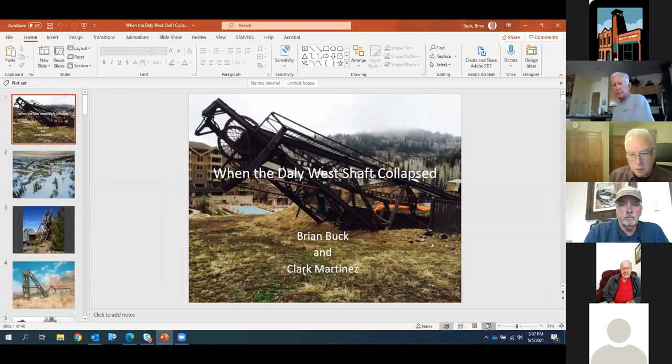So I'm going to go ahead and share my screen now. Does that look okay, everybody? So again, this is what the shaft headframe looked like after the collapse.

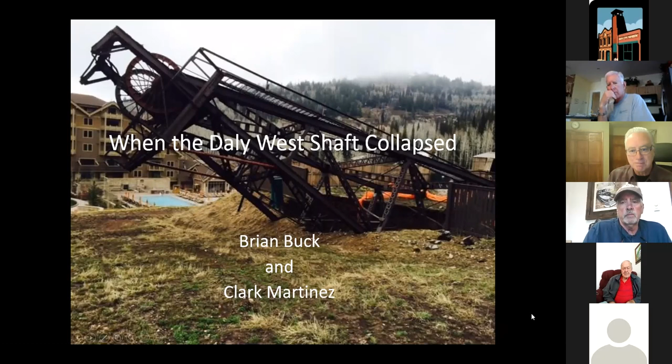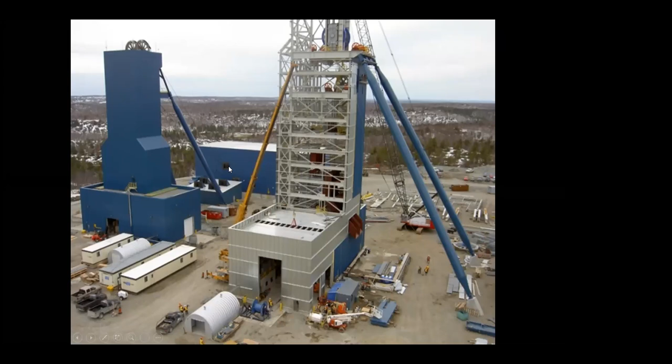The head frame under construction on the right is 15 stories high and not yet fully enclosed. Note the workers on the ground for scale. In cold climates, head frames are typically enclosed in buildings, which was the practice on most of the historic head frames in the Park City mining district.

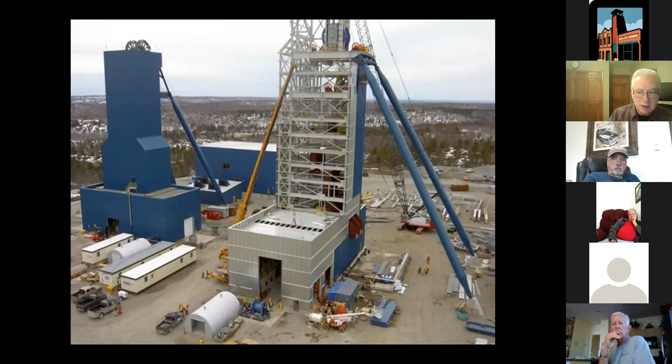Now let's focus on the Daly West shaft. It was started by the Daly West Mining Company in the early 1890s and eventually sunk to a total depth of 2,100 feet. The original wood head frame and hoist house was destroyed by fire in 1913 and replaced by an 85-foot tall steel head frame in 1914.

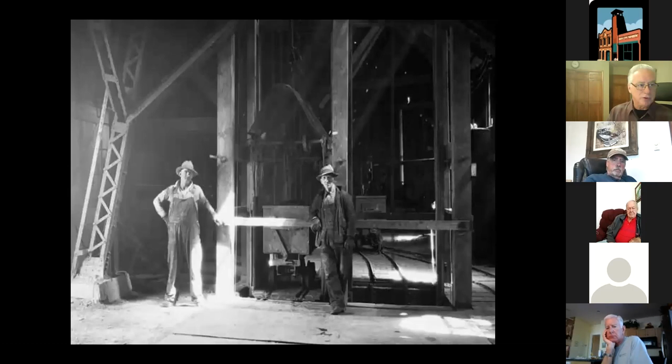This photo shows the interior of that building. One of the front legs of the steel head frame is visible on the left side of the photo. There are two shaft compartments visible in the floor, with a cage for the left compartment stopped at the surface, and you can see a mine car in the cage.

A cage was basically an elevator platform without walls that was lifted up and down the shaft with hoist rope. Miners would crowd onto the cages to go in and out of the mine, and mine cars were lifted up and down the shaft too. Kind of cool.

You can see the rails leading away from the shaft where the cars of ore or waste rock could be pushed away. In the picture, the right-hand compartment and cage must be in motion because you can see in the photograph the ghostly outline of that hoist rope moving quickly.

Note the only safety device at the shaft station are these single hinged bars that can be raised for each compartment. Check out how casually that one worker is leaning on the safety bar next to a 2,100 foot deep hole in the ground. Just shows you can get used to anything.

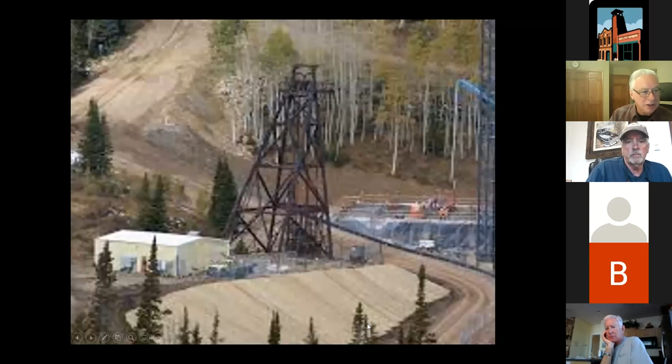The shaft continued to be used for mining purposes until the early 1980s, and then was owned by the Jordanelle Special Service District, or JSSD, to provide ventilation for their collection of groundwater draining from the mine tunnels that connected underground to the shaft.

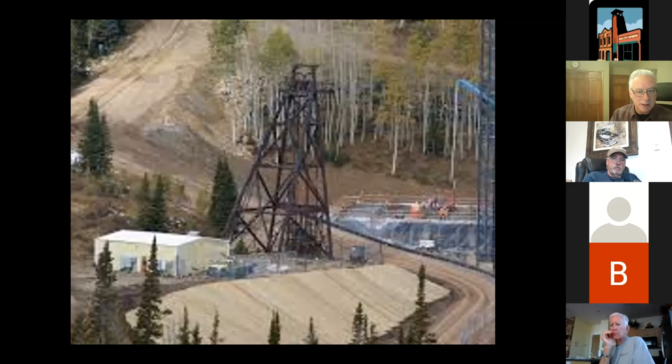This photo, despite its poor quality, shows the condition of the site in about 2007, when the Montage Deer Valley Hotel was being built, and the shaft was already surrounded by the Deer Valley Ski Resort. The 1914 vintage buildings from the previous photographs had already been removed, and a more modern hoist building and equipment had been installed. Most notable is that the shaft is no longer protected from the weather with a building.

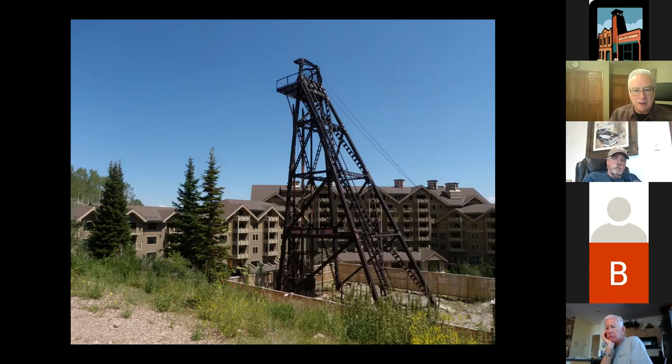Security wire fencing was installed around the top of the shaft framing to provide for safety of visitors within the site. You can see this chain link fence installed on the guides coming up out of the shaft. The shaft opening itself was surrounded by a concrete pad or collar. This picture shows the same front legs and the same cages seen in the earlier photograph.

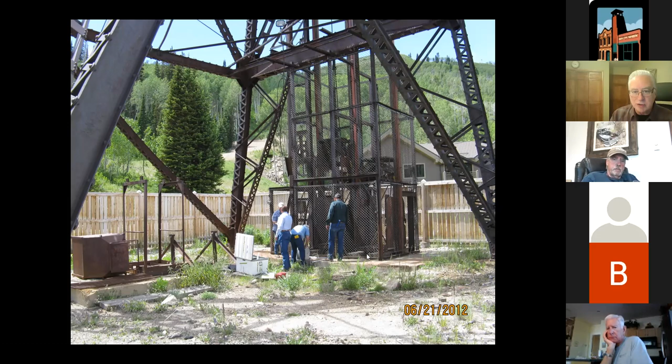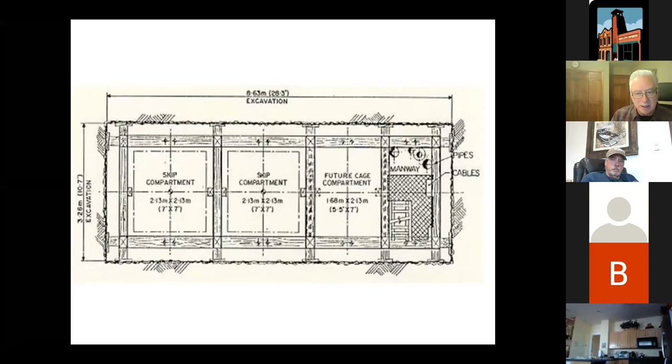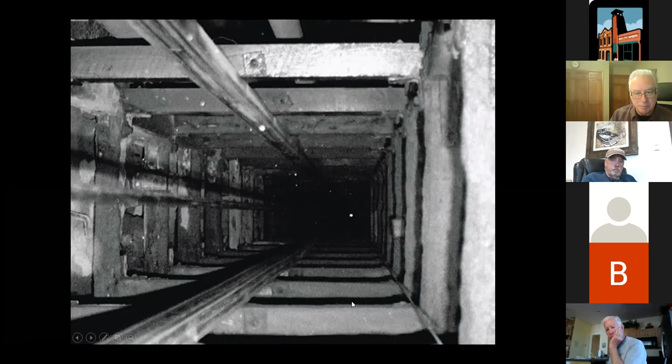Here's a view down a different shaft. You can see two compartments here: the compartment right in front of the camera, and off to the right is another compartment. You can see the vertical guides going on down the shafts, and of course the timber sets. Like before, the condition of the timber in this shaft again seemed to look okay.

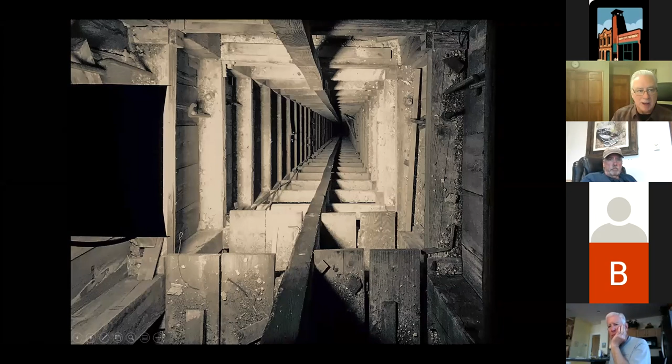Here we're looking down what appears to be a single compartment shaft. Note the boards here behind the sets. These boards are called lagging, and they suggest the need to hold back some unstable earth from falling into the shaft.

This is a common feature of the upper parts of many old shafts, because the earth from the ground surface down to, in many cases, tens of feet in depth, is pretty much soil and not rock. So that soil needs to be held back so it doesn't fall into the shaft. The soil was held back with this continuous shaft lining until you got down to the bedrock. Again, the timber and the lagging in this shaft appear to be pretty sound.

As said before, timber shafts require care and maintenance. Once a shaft is no longer in use and the maintenance stops, timber sets and lagging change over time. The timber sets may loosen and become deformed, as seen in this view down the old shaft. Can you see way down there? Some of the sets are starting to give way.

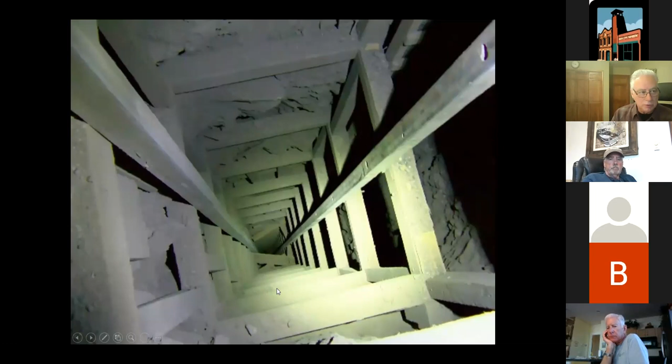Loose sets and guides and other parts of the shaft may begin to fall out of place, and then the rock and earth held back by the timber is also free to fall down the shaft. This is the fate of any shaft that does not receive regular maintenance.

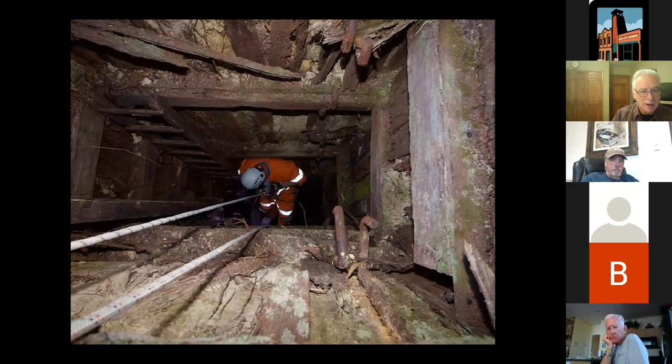Eventually, rotten timber sets and lagging can endanger the stability of any shaft with potential collapse. Look at the poor condition of the timber in this shaft as we look down to where the lagging is rotting away and the material behind it is beginning to ravel and fall into the shaft.

Here, it looks like an emergency recovery worker is possibly risking their life going down the shaft, possibly looking for a potential victim of a fall down the shaft. Unfortunately, this can happen when unwise visitors to old mine sites get into unsafe conditions.

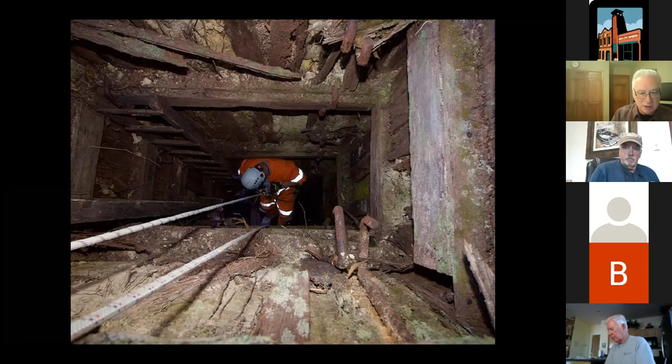This photo demonstrates the wisdom of moving carefully and watching where you step at any old mine site.

Now, some shafts are sunk from the ground surface down in solid rock. So even when the timber sets loosen and fall down the shaft like they have here, the shaft opening is still pretty much stable for the long term, but dangerous as all get out.

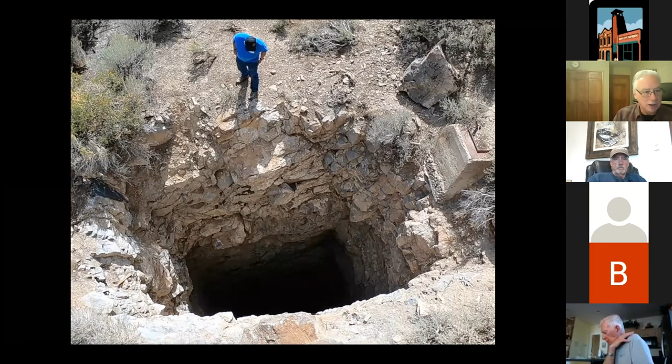However, this is not the case for shafts where the top portion is sunk through loose earth that is seasonally wetted by snowmelt and rainwater, further weakening it. When the timber sets and lagging begin to fail in these situations, the timbers as well as that surrounding earth begin to fall into the shaft.

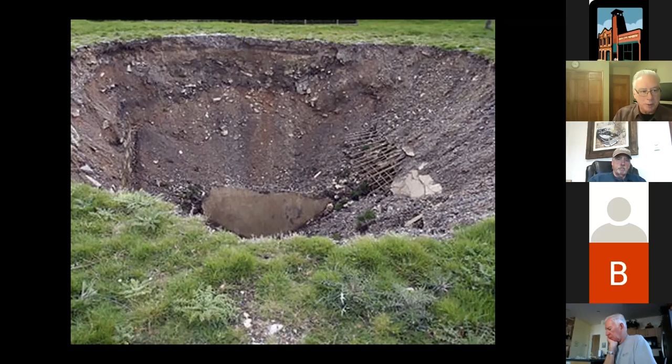The loose earth cannot hold a vertical slope, so it sloughs into the shaft until a crater is formed that is much wider on the ground surface than the original shaft opening. So you can see these openings are extremely dangerous to approach for obvious reasons.

Now, because of these safety concerns, the state of Utah Division of Oil, Gas, and Mining has been closing abandoned mine shafts and tunnels for years. And Clark has a lot of experience working on those projects.

In some cases, an open shaft is simply backfilled with earth from the bottom up. In other cases, a plug or cap is set in the upper part of the shaft, ideally just below the contact between that weak soil, earth, and solid bedrock. A cap is constructed to close that shaft across that weak earth.

The potentially unstable upper part of the shaft is filled with lightweight polyurethane foam, also called puff (P-U-F), to support that weaker ground so it does not cave in. The foam is placed as a liquid, and it rapidly expands to a strong solid that forms itself to the surrounding shaft opening.

In certain cases, a vertical culvert might first be set through that upper part of the shaft, and then it's locked in place by the foam to provide access into the shaft through that cap. Then the top of that culvert is closed with a metal grate to protect public safety.

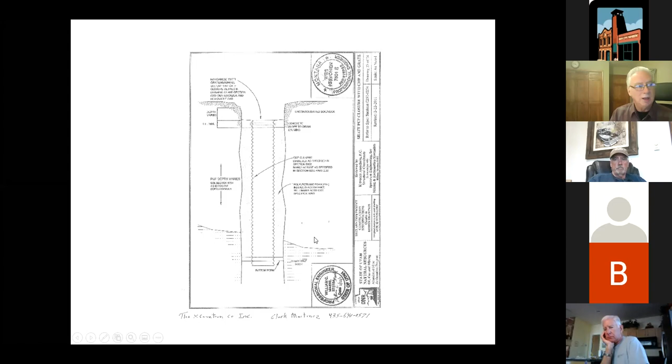A plug is placed down in the bedrock, and in this case a culvert was hung down to that point. The annulus, or the surrounding area between that culvert and the sides of the shaft, is then filled with puff. A concrete cap is placed on top of the puff, and the top of that vertical culvert has a safety grate on it to prevent people from getting into it. This is a typical design that the state of Utah uses, and Clark is very familiar with this.

After the early 1980s, the Daly West shaft was only used for ventilation of those underground openings. This purpose did not require regular use of the shaft hoisting equipment or maintenance of the shaft timbering. Clark thinks the last time that cage was lowered into the shaft was about 2004, and even at that time, it could not be lowered all the way to the bottom, something blocked it.

In 2012, the unconsolidated ground on the north side of the shaft fence began to cave in, and it caused an opening up to the ground surface outside that fence. That's what you see here in this picture.

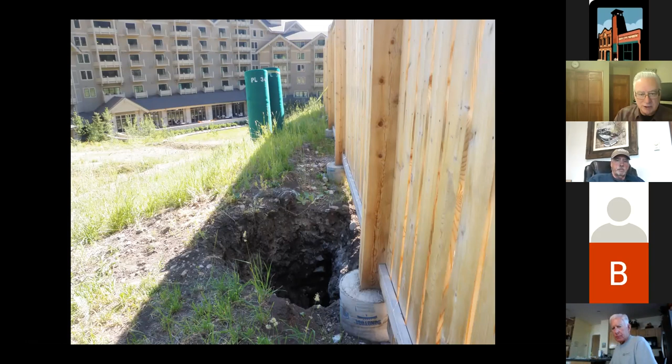Clark's firm, The Xcavation Co. from Kamas, Utah, specializes in closing these kinds of things, and they were hired by JSSD to fix this problem. The caved ground was excavated to expose where it was falling into the shaft, and puff, polyurethane foam, was used to stabilize the opening. Here you can actually see the shaft timbers, the lagging, exposed in this excavation.

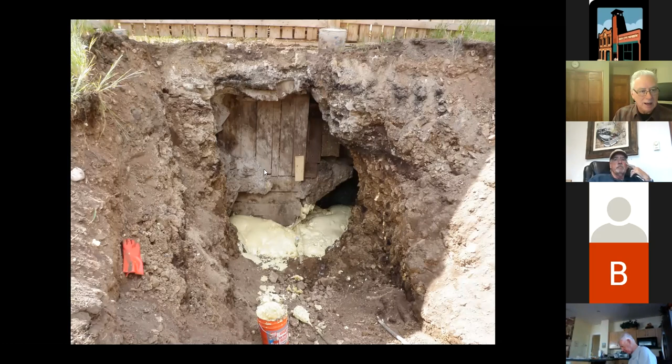The cave-in was filled almost to the surface with puff, and then a layer of concrete was placed on top of the puff, and then soil above that to the ground surface.

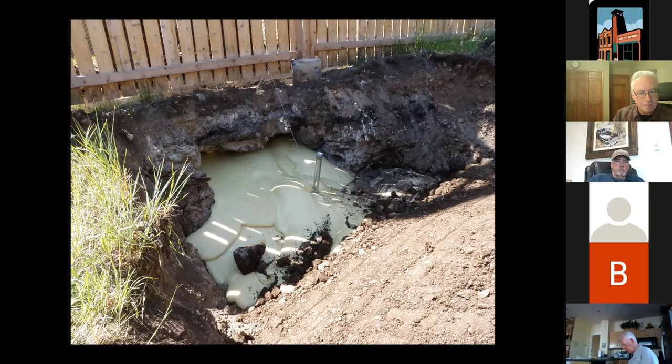A couple years later, in the fall of 2014, JSSD found that the soil on the south side of the shaft had caved in, similar to the one that Clark fixed. They recognized at that point that a general repair of the upper part of the shaft was needed, and they began talking to the Xcavation Company about that. But the onset of winter delayed this construction, and so that hole was covered with steel supports and tarps until spring.

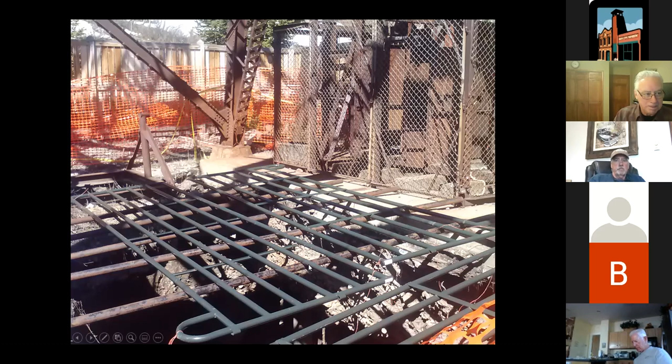The spring of 2015 was rather wet with snow melt and rain. The construction contract between JSSD and Clark's company was signed on Thursday, May 12th of 2015. However, at 7:30 a.m. the next day, Clark received a call from JSSD that Deer Valley Resort employees had just discovered this: the headframe had collapsed.

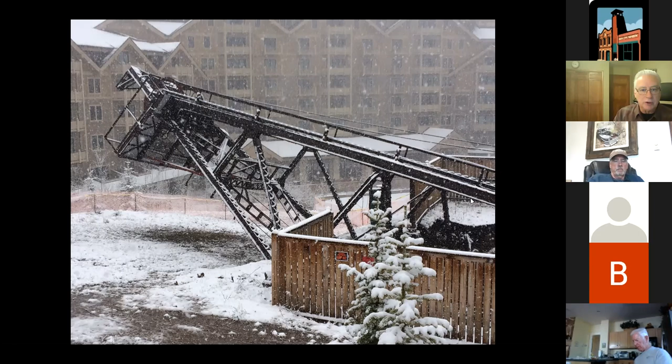When the ground caved under the shaft, it undermined the footings of those front legs of the headframe, which caused them to fall into the crater. That caused the entire headframe to tip towards the north.

The concrete collar and the shaft structures that we saw in the previous photo, between those front legs, were wrecked and also present in the bottom of the crater. This debris and the loose earth that had caved in along with it actually tended to plug the shaft opening.

When the headframe fell into the crater, the front legs were seriously bent and the cross members were separated. As the headframe fell, those back legs also separated from their footings and were also damaged. You can see the kink in this one back leg. That should be straight.

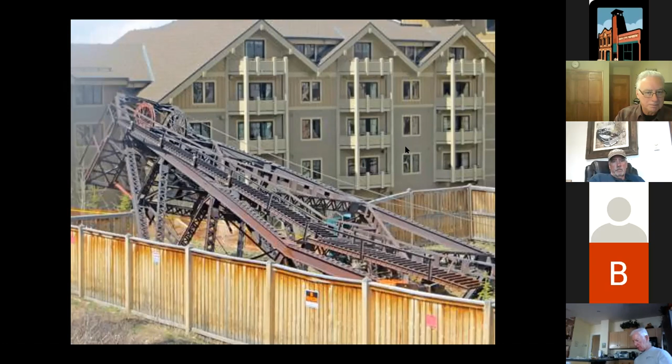As the headframe toppled over, the cages ran up the guides to the top of the headframe where the crown wheels were, and of course, they suddenly stopped at that point. This caused the cables leading back to the hoist to pull down parts of the hoist house roof and walls, and that's what we see here.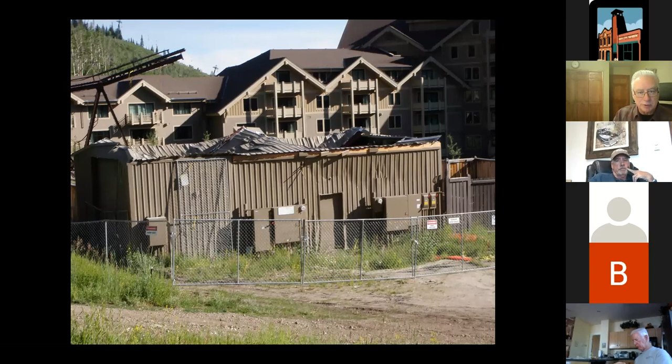Clark's company, the excavation company, teamed up with Spectrum Engineering to conduct the required work. Spectrum and their structural engineering subcontractor, Krivonen and Associates, came up with a design to cap the top of the shaft that included 4 main components.

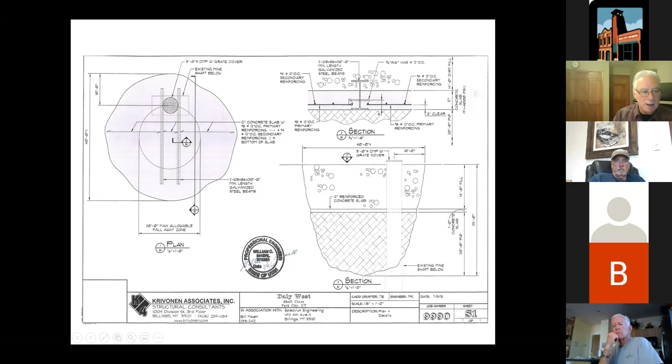A 5-foot diameter culvert would be suspended through the crater to the debris plug in the shaft to provide an opening down to that point. The very bottom of the crater, approximately the bottom 20 feet, would be filled with polyurethane foam. Then 2 30-foot long I-beams would be laid across the top of the puff, and 12 inches of reinforced concrete would be placed over the entire surface of the puff, reinforced with reinforcing bars, encapsulating the bottom of those I-beams. Then the remainder of the crater would be filled with earth.

These plans for capping the shaft were reviewed and approved by the city and by the EPA. So an early step of the overall project was to lift the headframe out of the crater to clear the site for installation of that cap into the shaft opening. The headframe weighed 85,000 pounds, and it took 2 large cranes to carefully pick it up. The larger pieces of debris in the crater were also removed. You can see the 2 cranes working here.

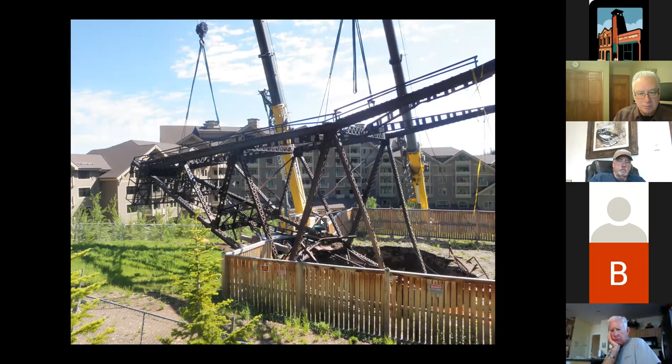The headframe was laid down at a location immediately north of the shaft. So here it is lying on the ground. You can see one of the cages has been taken out of the crater as well and laid down on the ground next to the headframe. And see the size of the crater in the foreground of this picture that has taken out the fence.

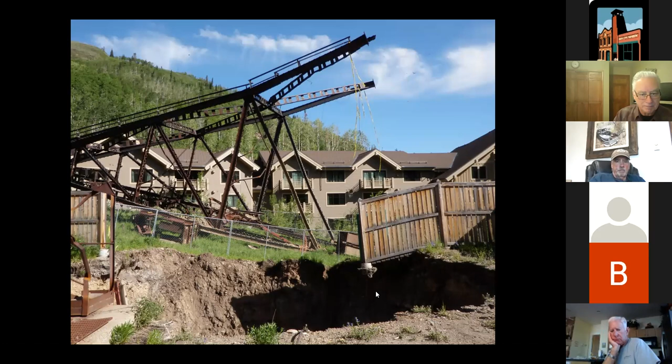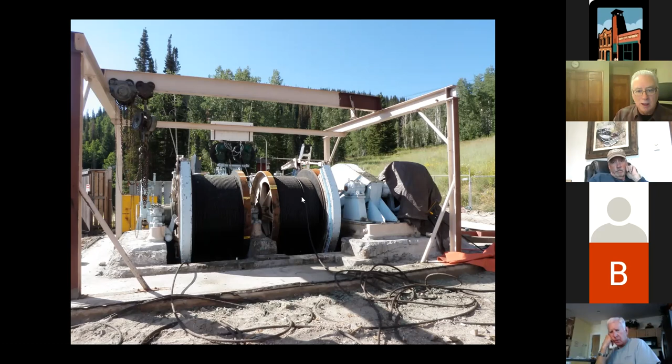It was decided that the hoist house was too severely damaged to be repaired, and it didn't have a use any longer. So the hoist house was removed, leaving the double drum hoist equipment behind and exposed to the weather. Here you can see the double drum hoist. These structures have been removed now, and that hoist is exposed to the weather.

So here we go. A crane lifted the culvert to the vertical orientation and placed it down into the crater for installation of the cap.

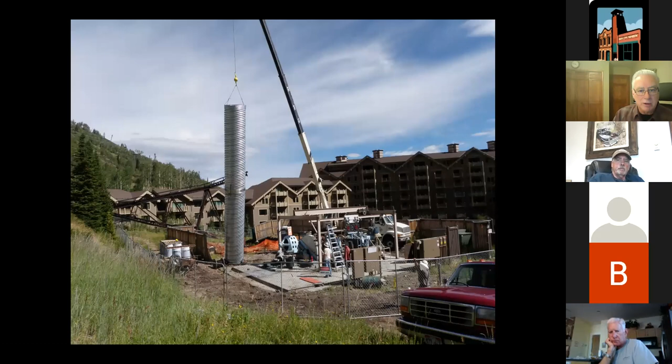The bottom puff section of the cap was then placed in layers over a period of about 3 weeks, allowing each layer of foam to cure to full strength. Here you can see the puff emplacement in the bottom of that crater.

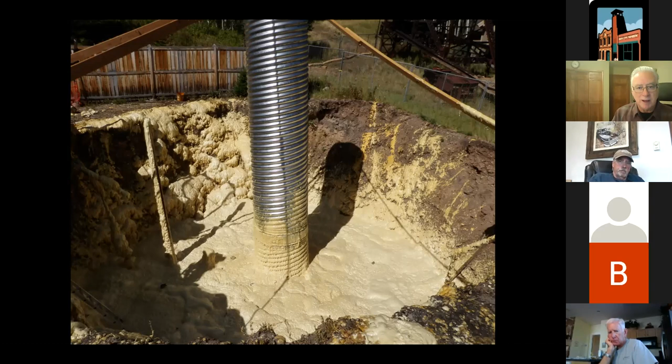The I-beams and reinforcing steel were then installed on top of the layer of puff. This photo helps to show the scale of that large crater that was being capped. Just look at the scale of all this ironwork. It's a big hole in the ground.

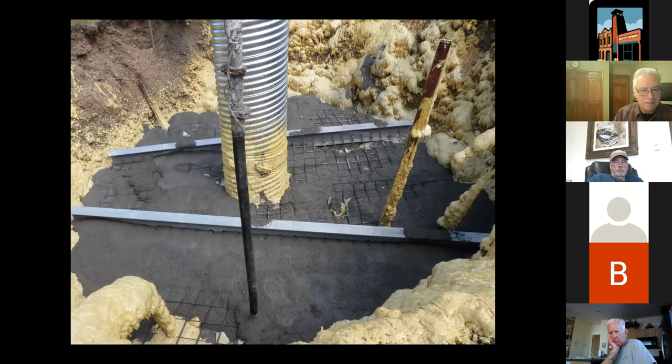The concrete layer was then placed on top of the puff, encapsulating the rebars and partially enclosing those steel I-beams to tie it all together. The remaining crater was filled with clean earth, and a security grate was installed over the culvert. This is what the shaft looks like today.

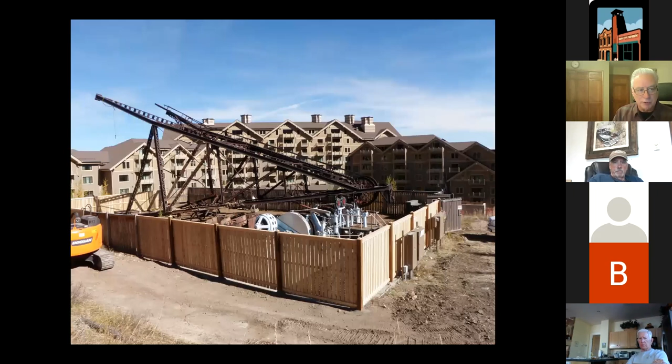Another crane was then brought in to pick up the headframe and lay it on its side within the site, and the wood fence was repaired. All this work was completed in the fall of 2015, and the site has remained essentially in this condition since then.

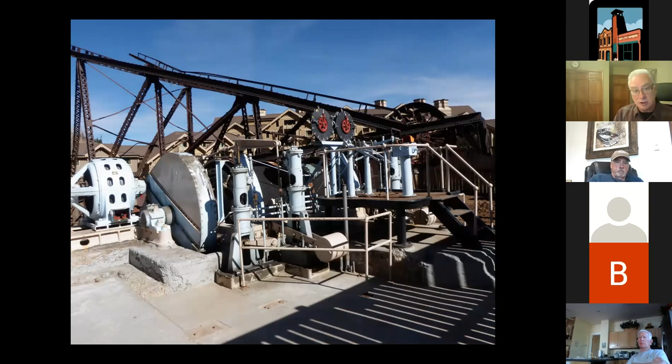But as Sally said, things are looking up for the Daly West headframe. The Deer Valley Resort acquired the shaft property from JSSD in 2020. The municipal government of Park City, the Empire Pass Master Owners Association, and Deer Valley Resort are now collaborating to fix the headframe and to raise it, as we heard, in August of this year.

Now, the engineers who designed the cap for the shaft recommended that the headframe not be placed over the shaft again. So the plan now is to fix the headframe and locate it just uphill of the shaft location, as you see here.

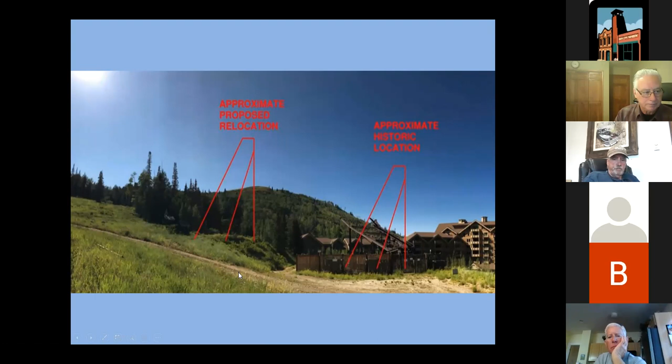So we look forward to being able to see this landmark of Park City's proud mining history once again standing tall. It'll be more than 107 years after it was originally built and 6 years since it fell down. This will be a most welcome and very appreciated gift to the community.

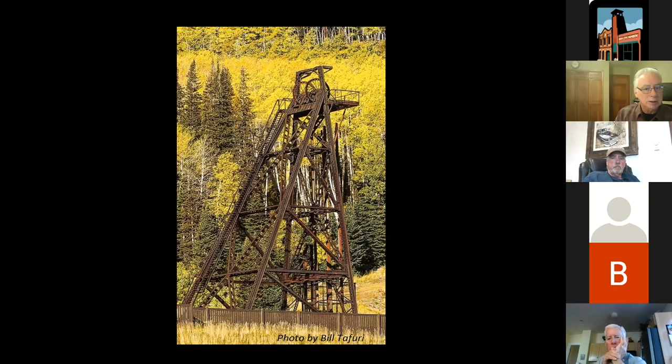So at this point, let us mention the work of the Park City Museum and its volunteer committee, the Friends of Ski Mountain Mining History. The museum and the committee are dedicated to saving the significant remaining mining structures around Park City and educating the public as to the rich mining history of the local area. This presentation that Clark and I are doing is part of that education process.

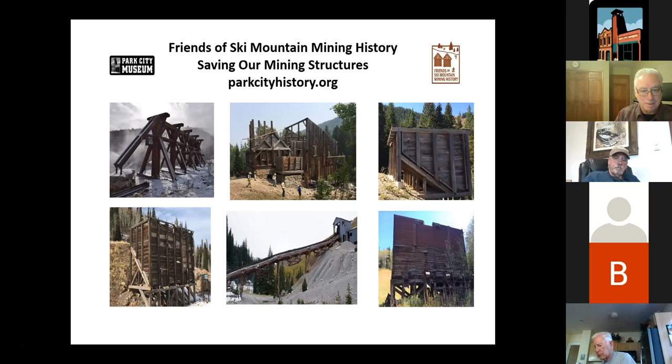Major stabilization projects coming up are two of the remaining shaft facilities in the area: the Silver King Coalition and Thaynes shafts. We want to minimize the potential for these head frames to suffer the same type of collapse as what happened at the Daly West. The Silver King shaft is shown here.

It is 1,300 feet deep, dates back to 1892, and was used for mining until the early 1950s. The shaft and head frame are enclosed in this tall building, but you can see these buildings are starting to fall down and need to be stabilized. However, we first need to deal with stabilizing the shaft, which is currently collapsing and threatening the head frame from collapsing itself.

The Thaynes shaft in Thaynes Canyon was sunk to a depth of 1,750 feet between 1937 and 1939. You can see it's a more modern facility, and it was used for mining until 1947.

The shaft connects at depth with the Spiral Tunnel, which was driven into the mountain between roughly 1916 and 1924 from a portal on the north end of Park City. This steel head frame is exposed to the weather, but the shaft opening itself is enclosed with a building. Unfortunately, the Thaynes shaft is also collapsing underground, threatening the stability of this head frame and the other surface facilities that you see here.

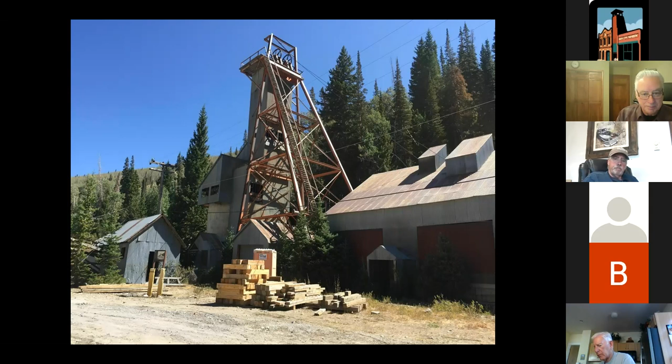The Thaynes shaft is important historically, not only for its past use for mining, but also because of its unique use in the ski industry that was just beginning in Park City in the 1960s. Beginning in 1964, the Spiral Tunnel and the Thaynes shaft were used as an underground ski lift for what was then called the Treasure Mountain Ski Resort.

At the shaft station in the tunnel, the skiers would leave the train, collect their skis, and were lifted to the surface, where they stepped into their skis and skied down Thaynes Canyon or took the Thaynes chair to Crescent Ridge above the summit house to ski the other runs.

This most unusual ski lift was operated seasonally for just a few years and has never been duplicated in all of North America and perhaps the world.

There's a great exhibit of this underground lift, including some of the Spiral Tunnel train cars, in the Park City Museum, called the Skier Subway Theater. It's a fun place to learn about how this worked.

Now, both of these projects are going to be expensive and will test our ability to obtain enough financial support, but we are motivated to prevent another head frame collapse like what happened at the Daly West.

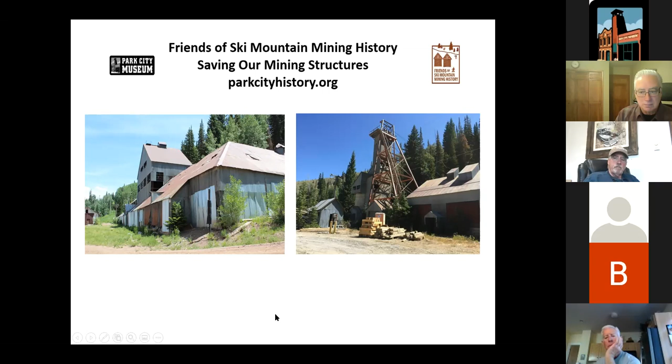Turn it over to you, Diane. Diane, may I say that once upon a time, Clark's father, Rich Martinez, the old miner, said that in the machine shop, he helped construct the cars that took the underground ski lift up.

From the Spiro Tunnel up to the Thaynes shaft. What an amazing family you have, Clark.

Thank you, Sam. I'd like to mention too, I've got pictures of my grandfather driving the ski train. That was one of his jobs, hauling the skiers in on the train. So your father and your grandfather, wow. Yeah. And your great-grandfather was a Park City miner as well.

Yes, he was. And in '78, I actually worked in the Daly West. We'd go down, we were on the 1,200 foot level rehabbing it so that they could get more air into the Ontario, and they were going to put a big fan down there on the 1,200 to help ventilation in the mine.

So the Daly West, I have been in the Daly West and down the shaft many times back in the late 70s. We have some amazing footage of traveling through the Judge Tunnel to the Daly West shaft and miners going through it. It's amazing footage. We'll probably be able to share that with you by the time the Daly West is raised.